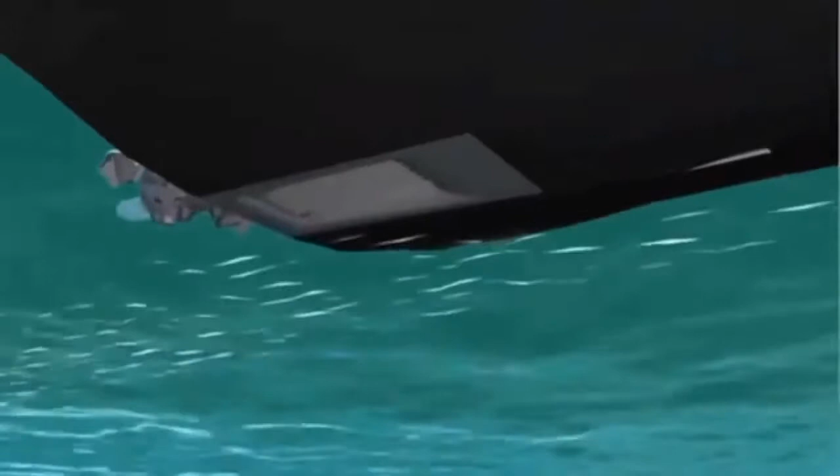The Hamilton Jet water jet is a highly developed water pump that has been designed for use in a wide variety of marine craft, operating in all sectors of the marine industry. Installed at the stern of a vessel, the water jet draws water from beneath the vessel through a hydrodynamically designed intake screen and into the pump unit.

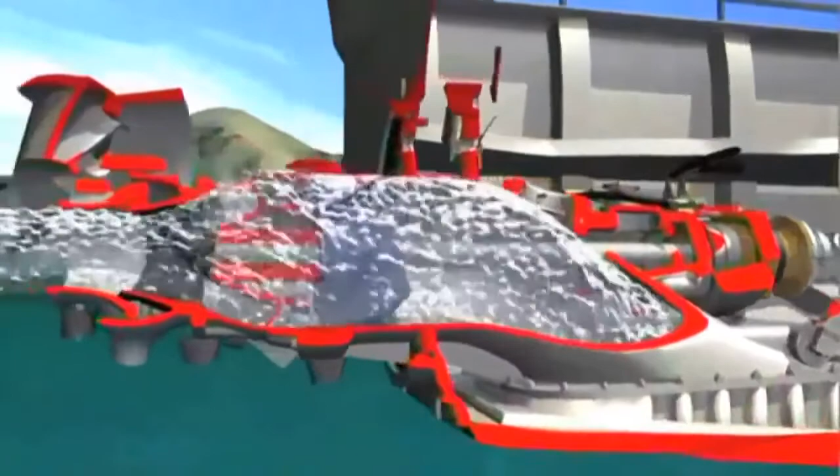Inside the jet unit, the computer-designed impeller accelerates the water, which then passes through a set of fixed stator vanes. These remove flow rotation created by the impeller to produce a more uniform and powerful high-velocity jet stream.

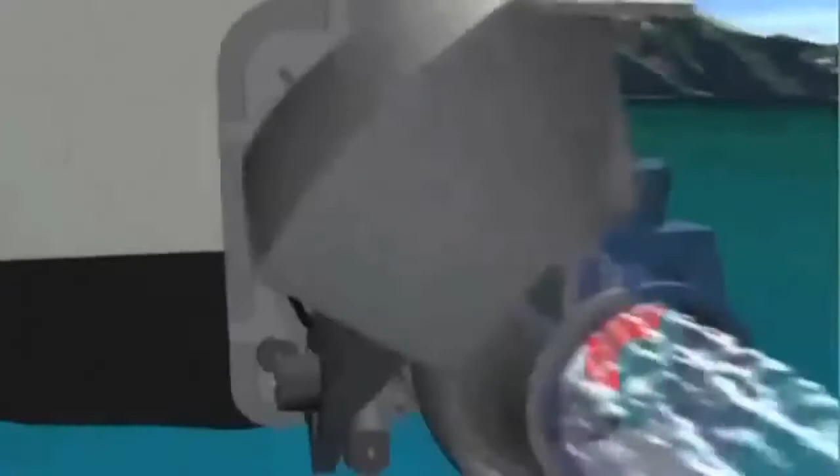Finally, the jet stream exits through Hamilton Jet's unique JT steering nozzle, where its energy is converted into powerful forward thrust. Each Hamilton Jet water jet features a fully integrated hydraulic control system for steering and reverse functions.

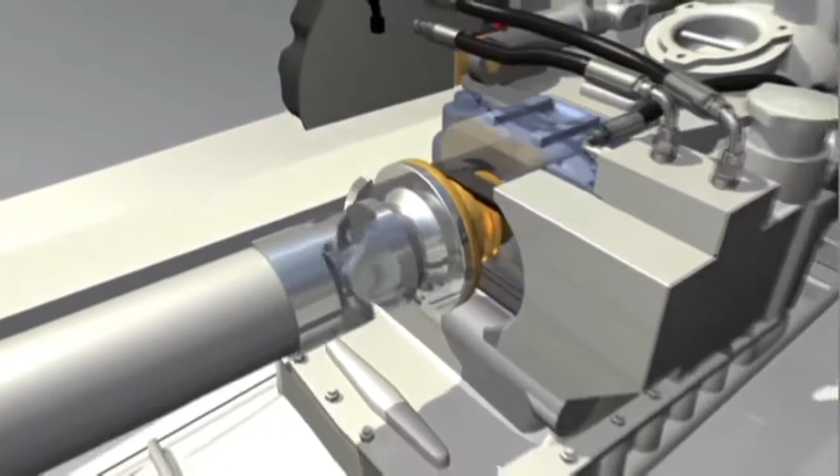The water jet and hydraulics are driven by a marine engine. Thrust forces from the impeller are absorbed by a thrust bearing built into the water jet housing. All thrust loads are transferred to the vessel's transom, not the drivetrain or the hull bottom.

Water jets have a number of advantages over other forms of propulsion when it comes to manoeuvrability, durability, and operator ease of use. A key factor in the control of a water jet powered vessel is that, unlike propeller systems, a water jet impeller will always turn in the same direction during normal operation, whether the boat is moving ahead

or astern. This means there is no requirement to shift the drive through a gearbox when going from ahead to astern, and provides for very rapid and accurate control of the vessel. This also reduces stress on the gearbox and engine.

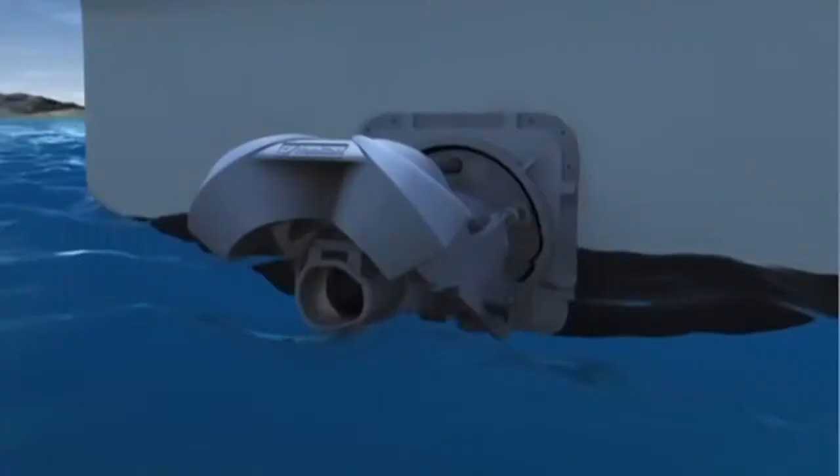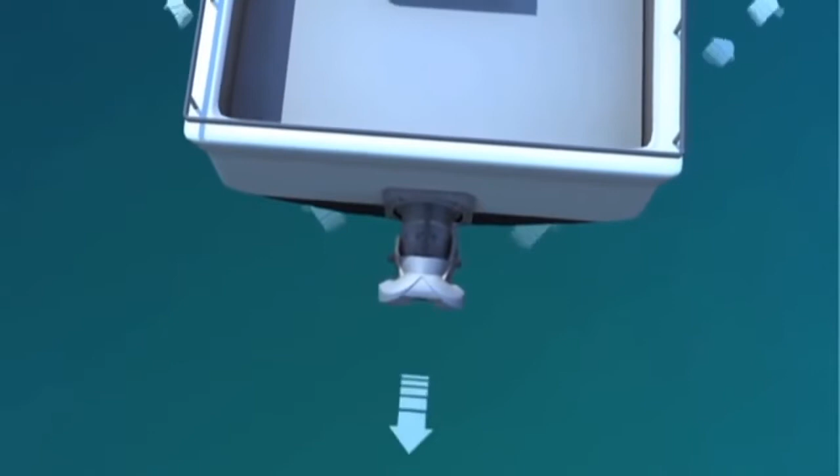What's more, a water jet's turning thrust is generated well aft of the vessel's transom, ensuring steering response from a water jet powered boat is immediate and highly effective, and allows for a small turning radius at all boat speeds. The engine throttle determines the amount of thrust provided by the water jet, so will affect boat speed and rate of turn.

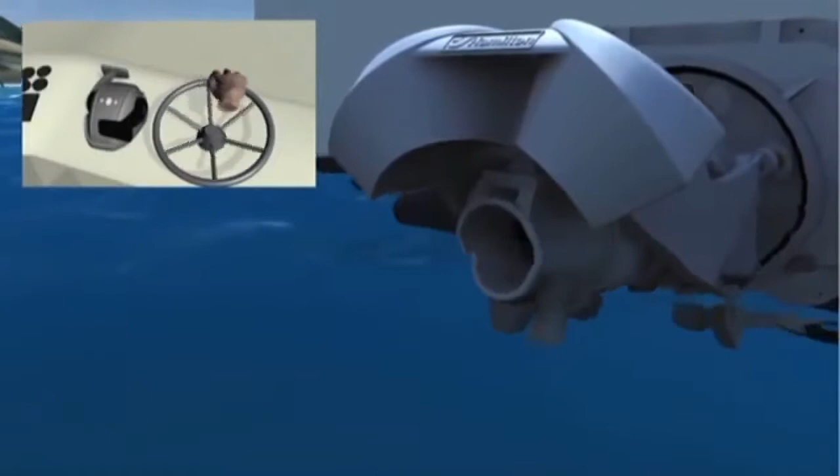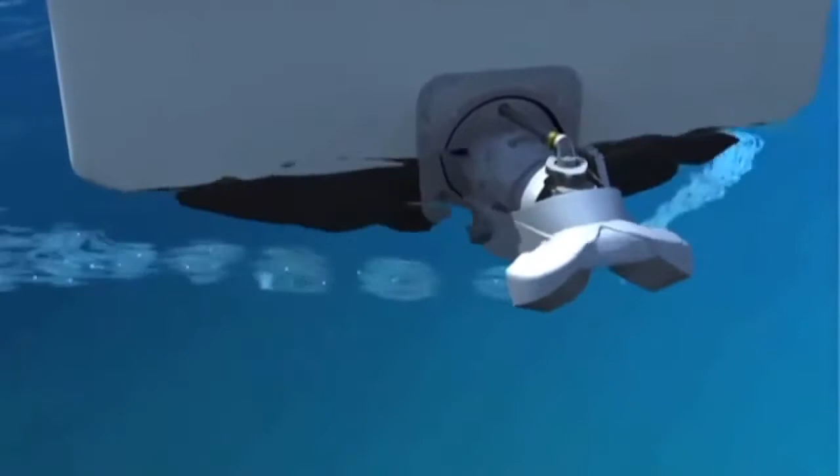The helm wheel controls the vessel's heading and rate of turn by moving the water jet's steering nozzle. The ahead-astern control lever raises and lowers the reverse deflector to adjust forward and reverse thrust levels. This can also affect boat speed and steering responsiveness when used in conjunction with engine throttle.

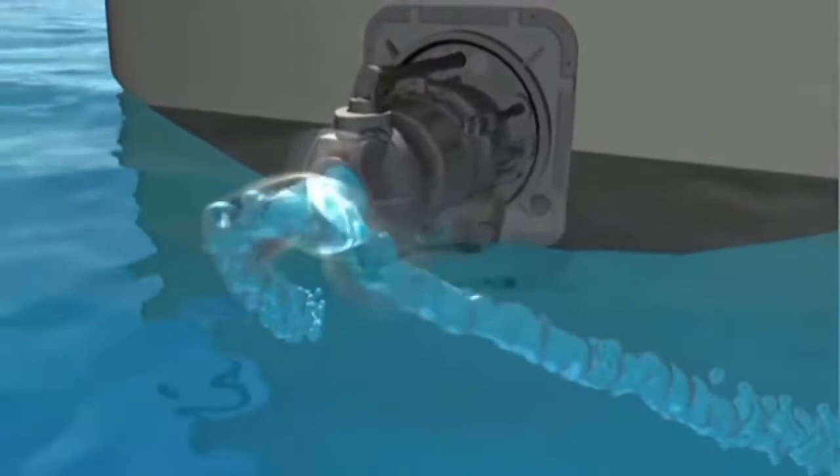The split duct astern deflector works by directing the jet stream down and to each side, so the water flow is kept clear of the transom and water jet intake. The result is high reverse thrust and sideways thrust.

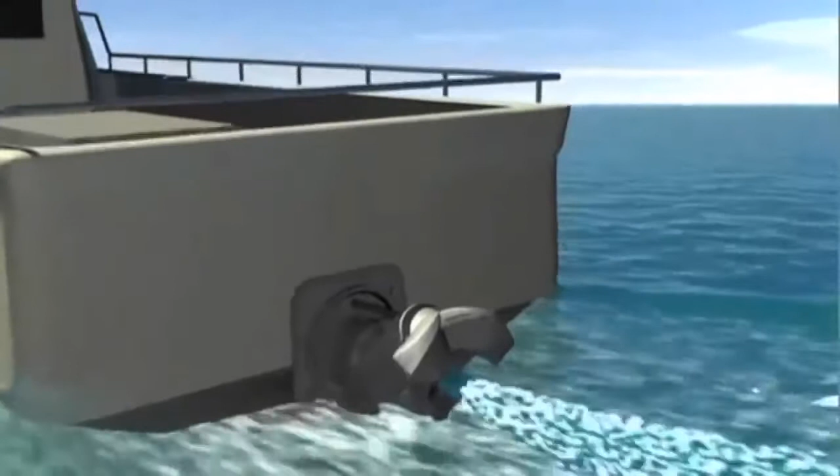With a water jet powered boat, steering response is directly related to engine throttle, not boat speed. The higher the engine revs, the higher the thrust from the water jet, and the greater the steering response. At low engine revs, thrust from the jet unit will generally be reduced, which will affect steering response. However, by lowering the astern deflector slightly and increasing engine throttle, steering response is improved without increasing boat speed.

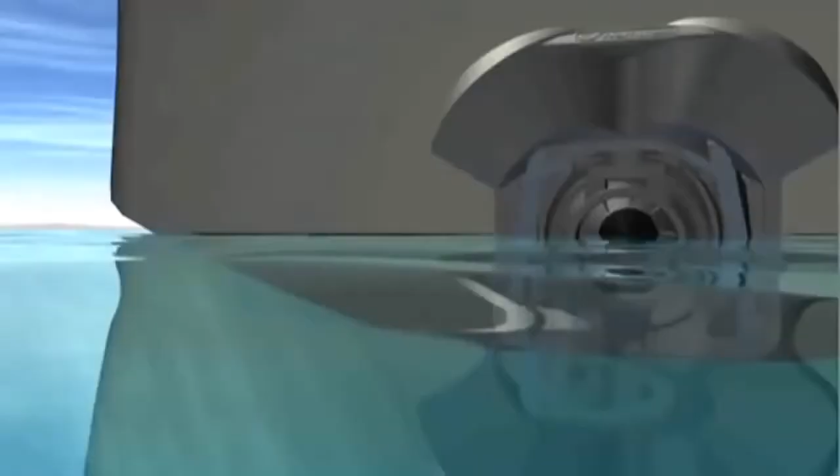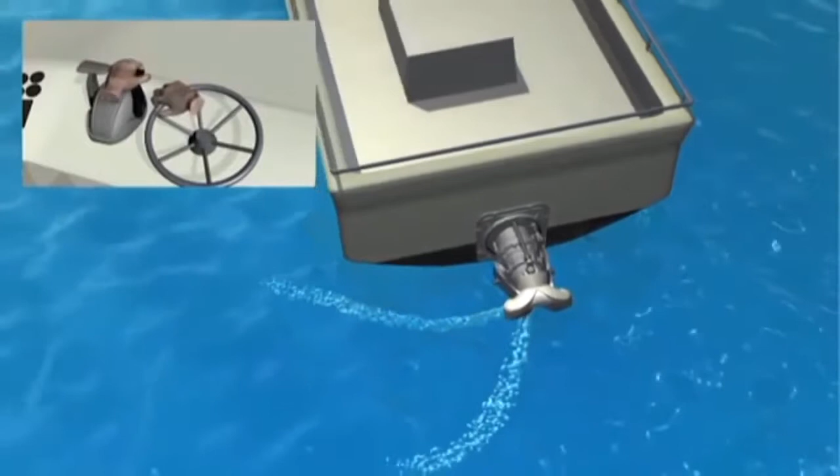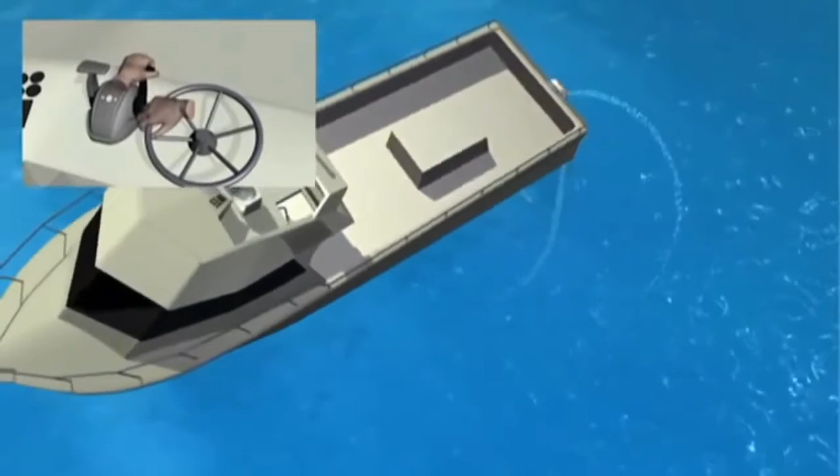The astern deflector can also be lowered to a central position, where forward and reverse thrusts are equal, so the boat is able to maintain its position regardless of the engine revs. Steering control is still available in this zero-speed position, allowing the operator to fully rotate the boat without moving ahead or astern. Increasing engine throttle at zero speed will increase the rate of turn while maintaining position, and raising and lowering the astern deflector slightly to either side of central will allow you to creep forward or back.

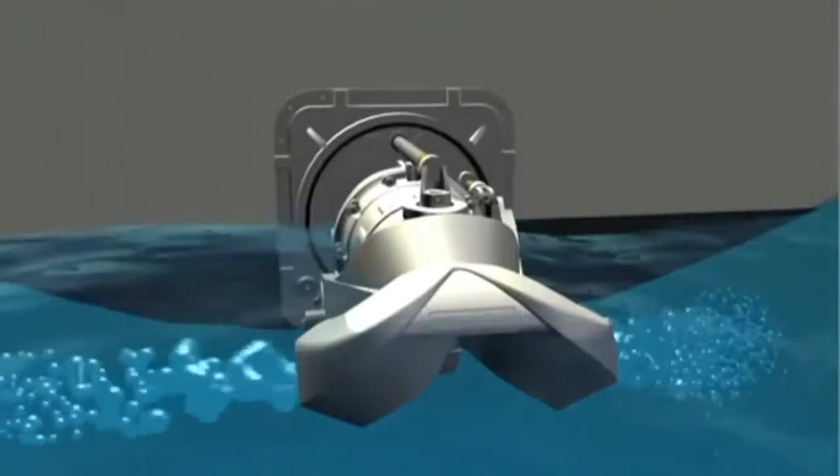In a high-speed emergency, the operator is able to lower the astern deflector into the jet stream without reducing engine throttle to effect a crash-stop maneuver. This will bring the vessel to a stationary position within a very short distance.

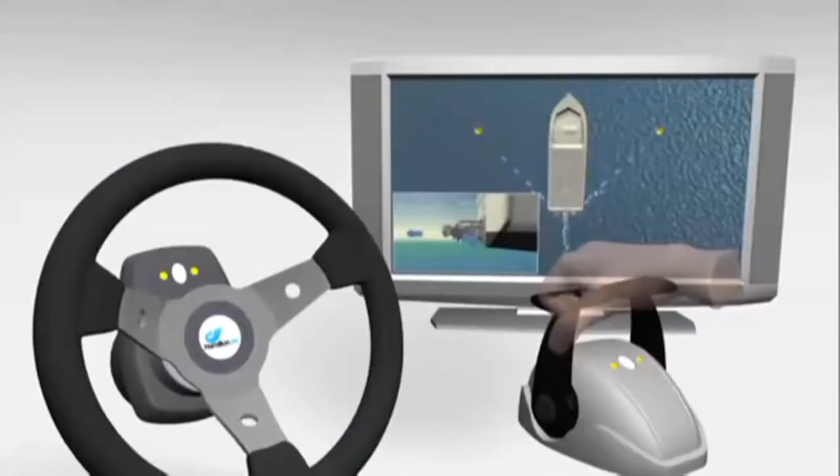One important aspect of Hamilton Jet water jet operation is that steering when going astern will be opposite to what the skipper may be used to from operating propeller boats or their car. A good rule of thumb is to remember that the bow of the vessel will always turn in the direction you rotate the helm wheel.

With multiple water jets, vessel control is further improved. For example, the skipper will be able to move the vessel directly sideways, which is particularly useful in docking situations.

A Hamilton jet-propelled boat is not susceptible to damage from waterborne debris. However, in some circumstances, performance can be temporarily reduced as a result of blockages. At high boat speed, water entering the water jet is drawn from close to the hull itself, so there is little chance of ingesting weed or debris.

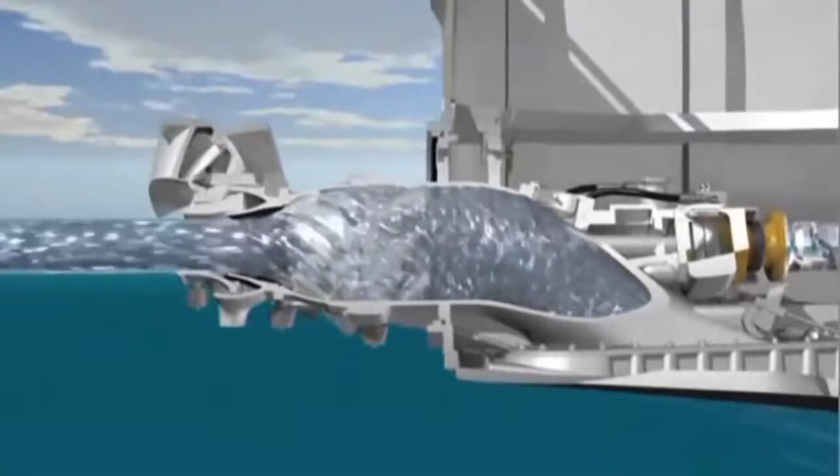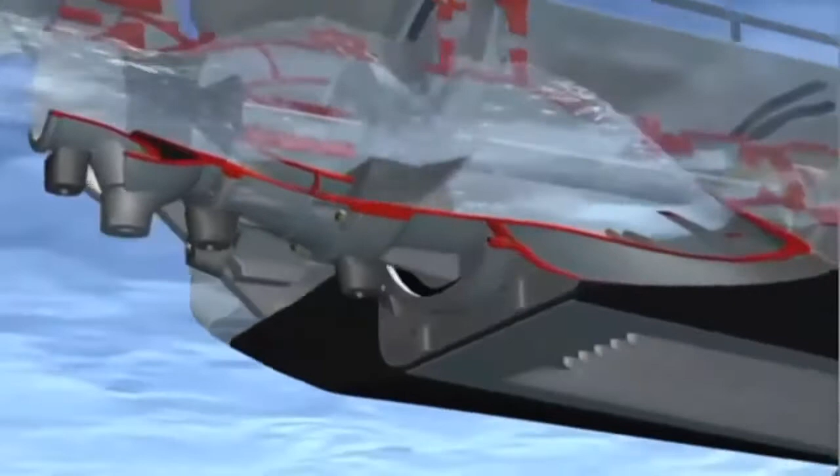However, in conditions where there is significant weed or debris in the water, there is some risk of blocking the intake screen at low boat speed, particularly when operating at high engine revs. Symptoms of a blocked water jet intake include an increase in engine revs, loss of thrust, and extra noise and vibration from the jet unit.

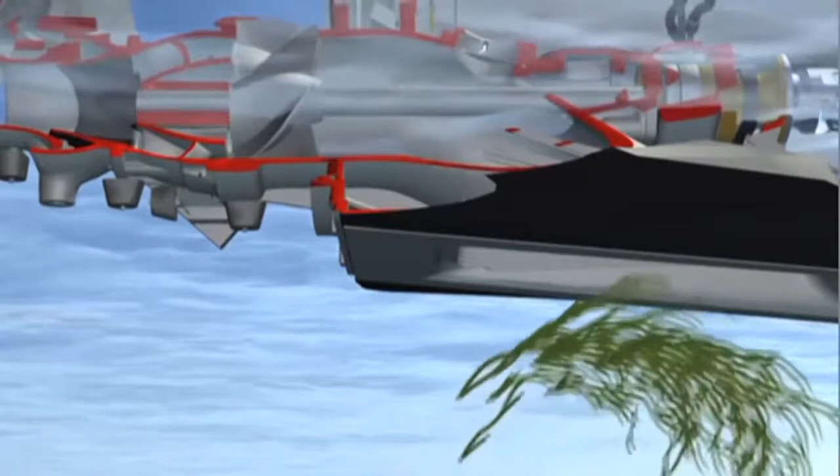The simplest way to clear the blockage is to turn the affected engine off and wait for the blockage to float clear before restarting. This is best done while the vessel has some headway. If your vessel has a reversing gearbox fitted, you can reverse the rotation of the water jet impeller to push the blockage clear of the intake. This is called back flushing the water jet.

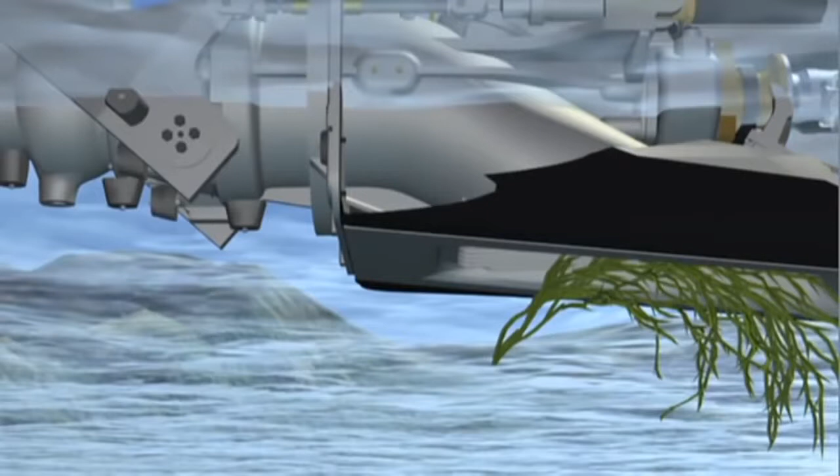If intake blockages are a common problem, you can have your water jet fitted with an intake screen rake. Activating the screen rake lowers a set of bars down between the bars of the intake screen to push the blockage clear.

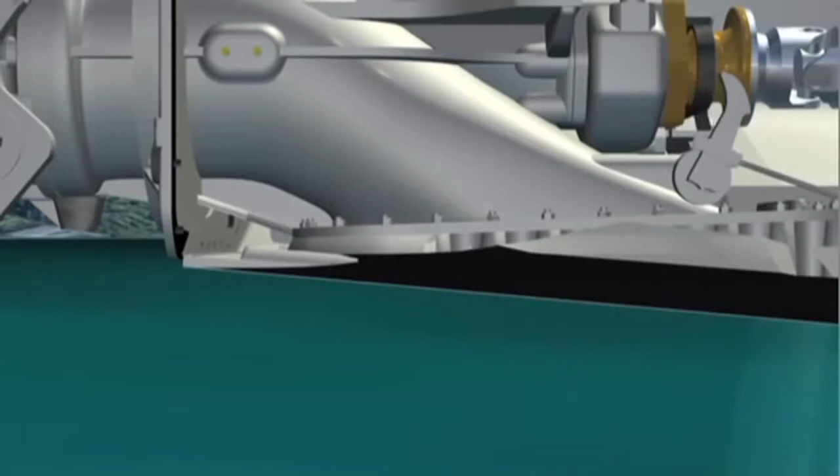If something is ingested into the water jet and wraps around the main shaft or impeller, it can be cleared by disengaging the water jet before opening the inspection hatch cover and reaching in to remove the object by hand. Always ensure your inspection hatch is above the waterline before opening to prevent flooding.